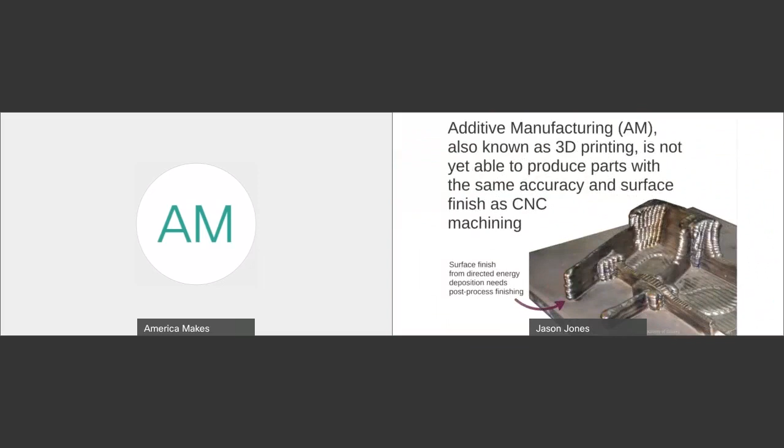Additive manufacturing or 3D printing does not yet produce highly accurate, super smooth surface finishes when you compare it to something like milling or molding or something like that. As a result, many of the parts require some finishing. Obviously, if they're metal or polymer ceramic, they typically follow a different path. Certainly for metal parts, the majority of them do have some machining or polishing or grinding done on them. So in terms of thinking through what's needed for additive, you've got the finishing elements, and also the inspection requirements get changed up when you do additive.

You may have to go for a heat treat, cool down, remove them from the build plate, often a finishing operation, and finally some type of inspection. This post-processing, as we often refer to it, isn't talked about enough, in my opinion, and often it accounts for somewhere between a quarter and maybe up to half of printed part costs.

I've even seen 60% before for safety critical parts that need a lot of attention from inspection. So when we say bring additive together like never before, there are a couple of ways to do that, but it's not just additive that we need. We need all of the complementary technologies around additive to really give it its full breadth and get those parts across the finish line. Once you've printed a part, until it's actually finished, it doesn't actually do anybody any good.

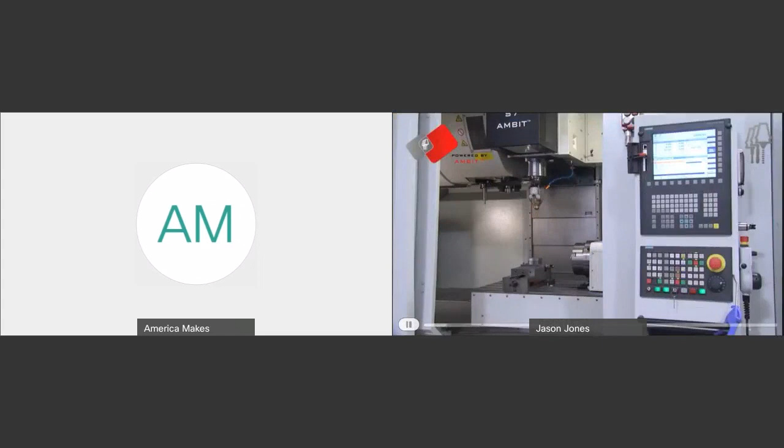What you're watching is a milling machine that actually just loaded a metal deposition head. You can see here deposition of a metal matrix composite. This is a tooling insert, and so the edges typically wear the fastest. We've just reinforced those edges with a different material, a higher performing material. If you look carefully in the video, you can see that multi-material joint.

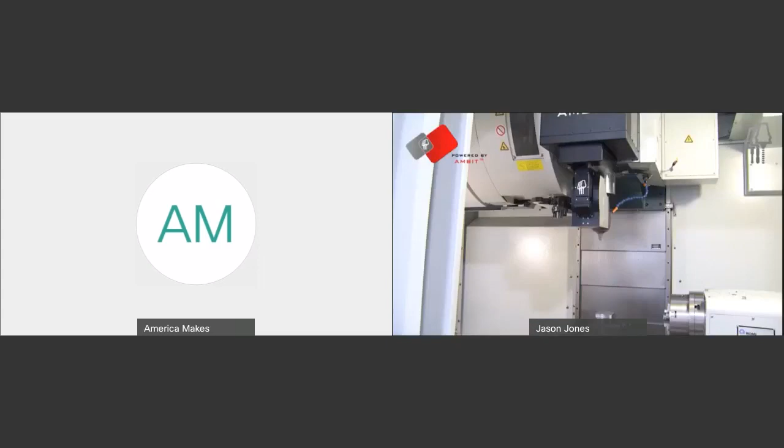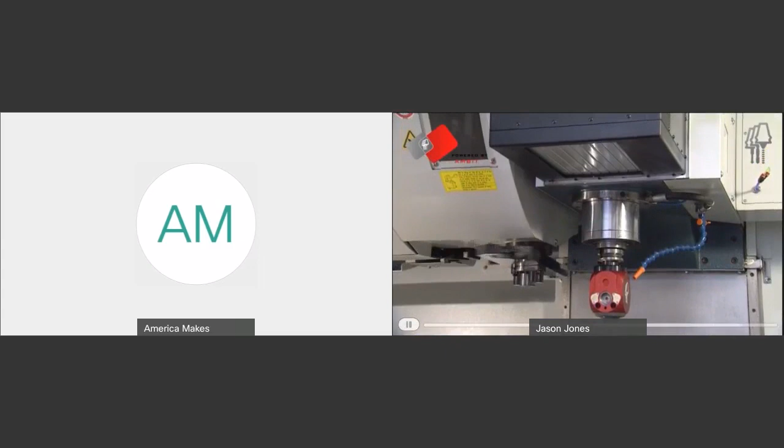After deposition, we want to know that what we've deposited is good. So here we're using an eddy current inspection probe to actually check for surface breaking and shallow subsurface defects in the part, and all of that was done in the same setup. So we migrate from what traditionally might be three different setups and bring them all together so that you can get a fully automated finished product right out of the machine.

So in this particular example, again, it's a tooling insert used in making other things. We're looking for a 2 to 3 times service life improvement. Fully burdened cost to add those edges, if you look behind my hands, was about $13. It adds something like 10 minutes to the cycle time. It's already in a milling machine anyway. We're just using that milling machine in a more flexible approach.

And probably most importantly, it provides a no faults forward way to adopt this technology. So you know your parts are good before they leave the machine. We don't know of a more time or cost-effective way of actually producing this particular part.

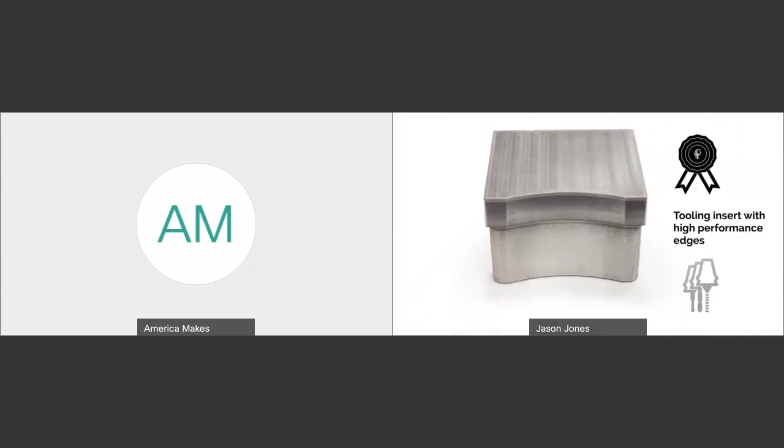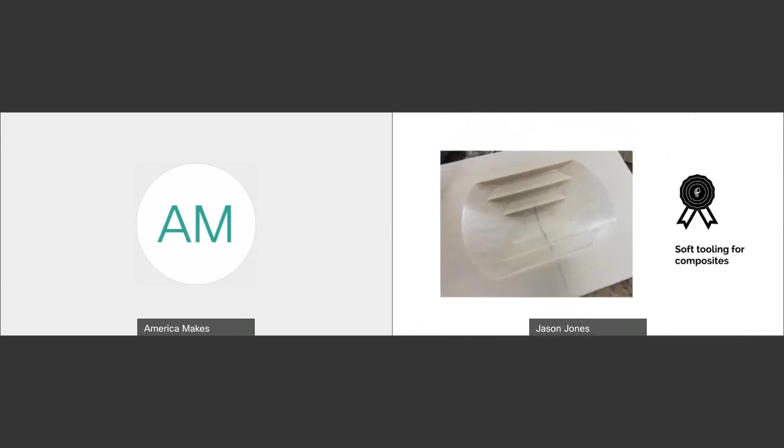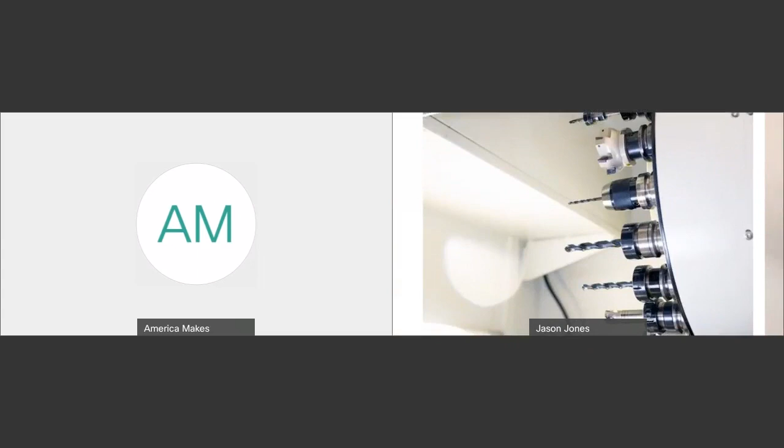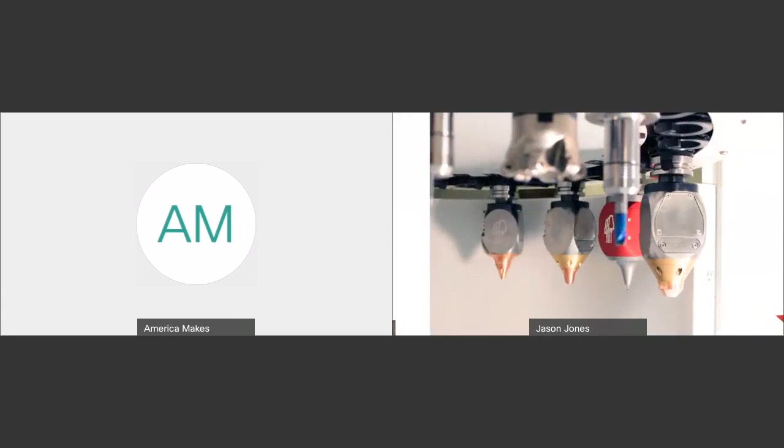So I hope that provides you some background in terms of where we're coming from and why I can describe that additive can be more finished, more polished as it comes out of the machine.

So let's level set with some foundational principles that I hope you'll find useful. First, if we look at AM as unfinished business, did I actually just call additive parts unfinished? And I did. Obviously there are a few exceptions to everything, but the majority of parts made by additive, if they're going to an end user, typically require some kind of finishing afterwards.

We already talked about the fact that the surfaces typically are not as smooth as milling or molding, and the inspection requirements are different, and this part workflow is fairly complicated. In fact, in many cases this actually is a supply chain issue because maybe not all of these steps are done in-house. So we refer to it as a process chain. It may be done all in-house, or it may be farmed out. You may have heat treatment done somewhere else. You may have finishing done somewhere else.

You may have inspection done somewhere else.

One of my early insights into this was when we were looking at a remanufacturing application with directed energy deposition. We were able to do the deposition, but then in order to get it finished, it literally traveled. The parts traveled, not just next door, but in a truck.

It was all land-based, but in a truck to another facility. It then had to go somewhere else to get inspected, and finally it came back around. So it was a very long path to getting to finished parts, which clearly, as more and more people adopt additive, it's desirable to compress and consolidate those, to make it easier.

Most people come into additive thinking, oh, I have to master additive, but once they find they've got all this post-processing, it's a lot more than many of them anticipate.

So I've thought, how can I summarize today's message in a single symbol? And if I was going to think about a symbol for additive or for additive development, clearly the plus sign is one of those symbols that jumps to mind. So for the rest of today's discussion, I'd like to use this plus symbol as an analogy and a map of how additive is developing, both here at Hybrid and within the larger marketplace, so you can see, as new announcements get made, where it's going. As we look at this plus symbol, I'm going to divide it into the vertical stroke.

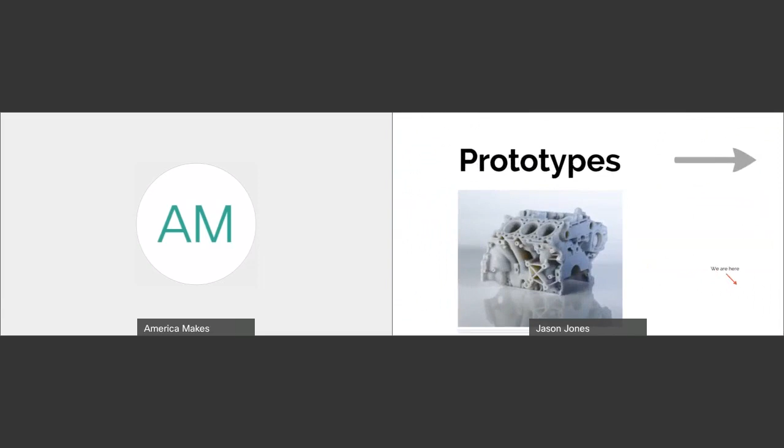So where are we at as an industry? Back in 2009, I was one of the founding members of the ASTM F42 committee, which started writing standards. At that point, we had to decide what to call our industry. Back then, we were not as far along as I point out in that era. We were definitely well entrenched in prototype making. We were looking toward making final parts. And I describe the early majority now as being in between making prototypes and production parts.

Clearly, many people make prototypes, a fantastic application for additive. Now many are also looking toward production parts, and that segment of the market continues to grow in importance and size as a relative proportion of additive parts. If you're not thinking about producing parts in an additive way, we see many people doing low volumes of parts, especially those that can be customized or tailored, that need light weighting or specific types of composition, now looking to production as additive as a production technique.

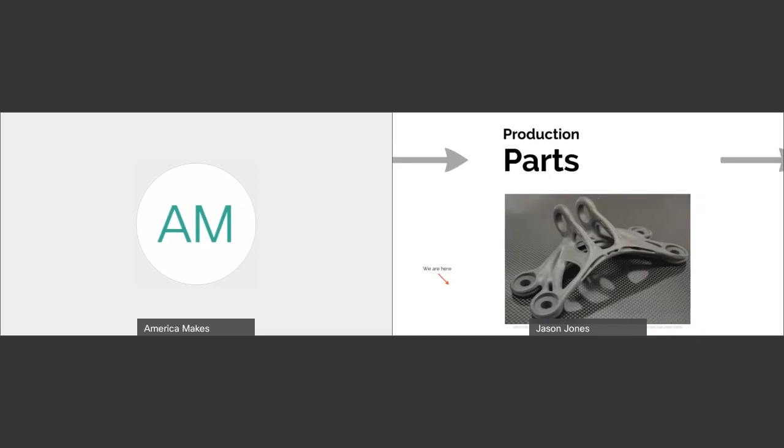As we look a little further into the distance, we see smart products, and now very early adopters are starting to tinker with that. Certainly the research world has been working on that for a decade and a half at least. It's fun to see this progression from prototypes to production parts all the way to smart products.

If we look at the application frequency today in the market, we would put prototypes on the bottom as still the dominant application, with production parts moving up to be close behind it. Smart products are just on the horizon, and we're starting to see some really interesting examples.

If we fast forward a decade, I would argue that this pyramid will actually invert, that prototyping will become so mainstream and routine that it will be commoditized. Producing production parts will provide more value, and the highest value will be smart products that have embedded intelligence and can monitor themselves. So that's where we are from an applications perspective.

Let's look at where we are from a materials perspective. Materials matter an awful lot in additive. You'll recall that on this plus symbol, I'm referring to the horizontal stroke. As additive reaches more broadly to more materials, the applications addressable by it continue to get more interesting. So applications development and adoption is usually paced by materials development in additive.

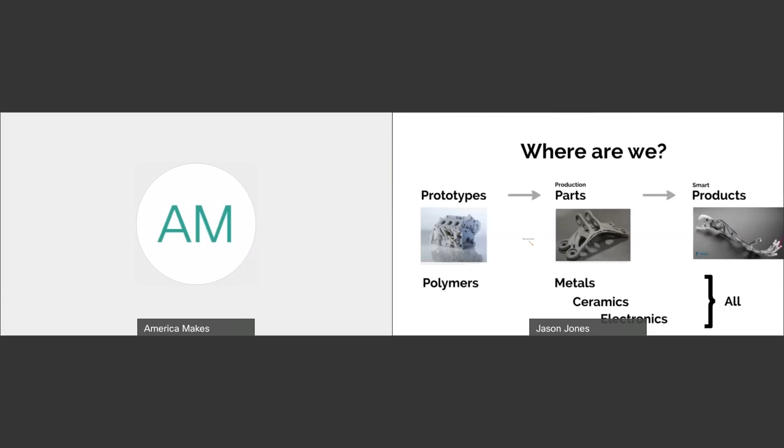But that's the spectrum of where we're at. We're well centered now on production parts, and more people are adopting it. Just over the horizon, in terms of mainstream adoption, is smart products. So there are lots of applications. This is just a map of where a lot of those materials fit and how they enable additive.

So let's look now — we've done applications and materials. Let's look at the processes, the different additive processes. Here on screen is a very colorful graphic that summarizes all 7 of the standardized families. You could refer now to additive as 7+. There are a few newer techniques that aren't super well categorized within these 7, but this represents the majority of additive processes. We created this as a resource for our employees and now have made it available on the website.

Anybody that wants to can go download it. It gives you a little summary of the different categories according to ISO and ASTM and kind of what they're good for. Why are there so many?

At one point I had a very prestigious organization visit. They were getting into additive, and at the time I was a researcher at university, and they said, there are too many types of additive. We're going to come in with our technology, and we're going to really help consolidate — we're going to rationalize away several of the additive techniques. I thought an awful lot about that and watched as they then launched their system, which is a great system.

But from my perspective, it has not rationalized away a bunch of other processes — it just continues to expand. I think that's because of the very diverse set of applications, and also because each of these 7 families, which fundamentally represents a set of physics, or physics and chemistry together, is usually really good at either a type of material — maybe things that cross-link — or one type of feedstock, like powder, pellets, or filament. But not every one of these techniques can accept all the different types of materials that we want, nor can they manage all the different types of feedstock that people would like to use.

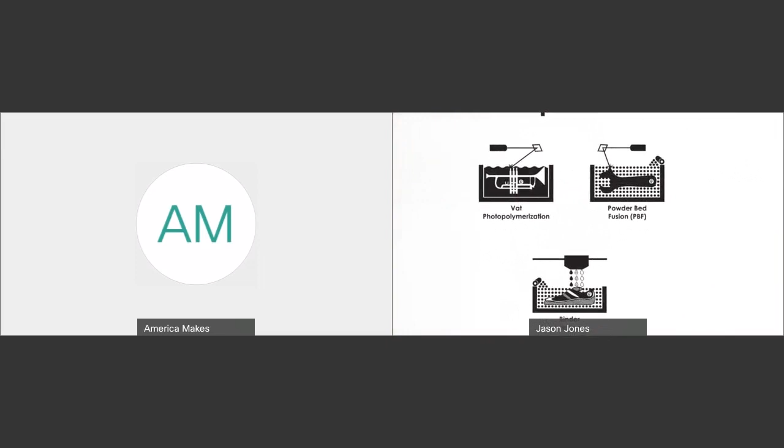I've grouped the 7 families by their digital step. On the left here, I have selective exposure, which is selective exposure to energy. You can see I've listed vat photopolymerization, powder bed fusion, and binder jetting—selective exposure of a binding agent, energy, something like that, even chemistry sometimes, to be able to make it work. Here's an example.

Here you'll see this is a powder bed fusion machine. It's using an electron beam, but that powder has been globally pre-placed everywhere, and then only the energy is selecting what part of that powder gets consolidated into the part and what doesn't. At the end of this, you'll watch that powder gets spread across into a new layer. Again, it's a global application of material, and then the selection step is exposure of energy. Hopefully you saw that spreading going across.

So in contrast to that—selective exposure—these processes tend to shine where you look for geometric freedom. They're really, really good at creating complex internal geometry.

In contrast to that is selective deposition. I'll give you an example here. In this case, rather than having material pre-placed, this material is being placed at the same time it's being consolidated. So this is a laser-based directed energy deposition technique, and it is an example of selective deposition.

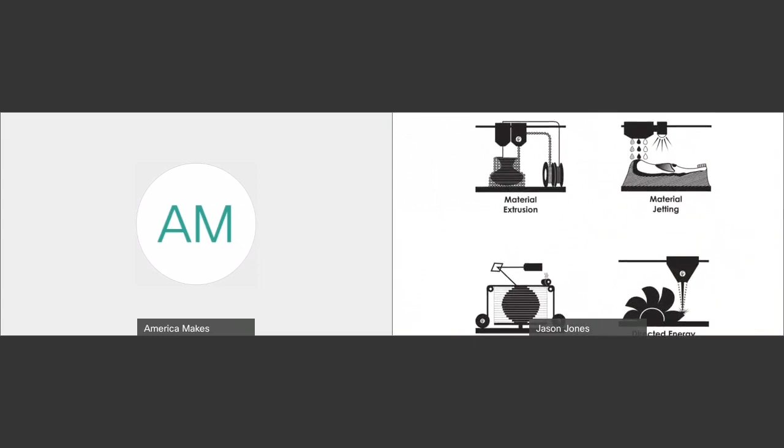Included with these, I've listed here 4 of the 7 families, and I include material extrusion, like desktop printers, material jetting, sheet lamination, and directed energy deposition. So roughly the additive families divide half and half between these different types of digital steps. I'll just add that selective deposition really shines often where you're looking at compositional freedom and the ability to vary what a part is made from, either holistically or even different features, elements, or graded compositions are possible with many of those. So this digital step framework, I hope, gives you context.

What you'll find often is, especially larger scale additive companies, they will typically cluster around one or the other of these. If you're really interested in this idea of selective exposure versus selective deposition, I wrote a paper a long time ago—about a decade ago, actually—and explored that in more depth. So if you're that interested, you can go off and look at it.

But I hope as a visualization, this helps you keep separated what's what and what is easier to combine with others. Clearly, as we look at trying to reach across different types of additive, selective deposition is easier—it's more compatible in nature in terms of creating multiple types of additive together, although powder bed isn't to be excluded. Selective exposure, vats and powder, is really how those two break down.

Certainly, as you look at critical technology elements, either in your company or within your organizations, I highly advocate that you could actually identify: these are needs that apply to all 7 families, these are needs that apply to each individual one of the 7 families, but you could also then do it by the digital step.

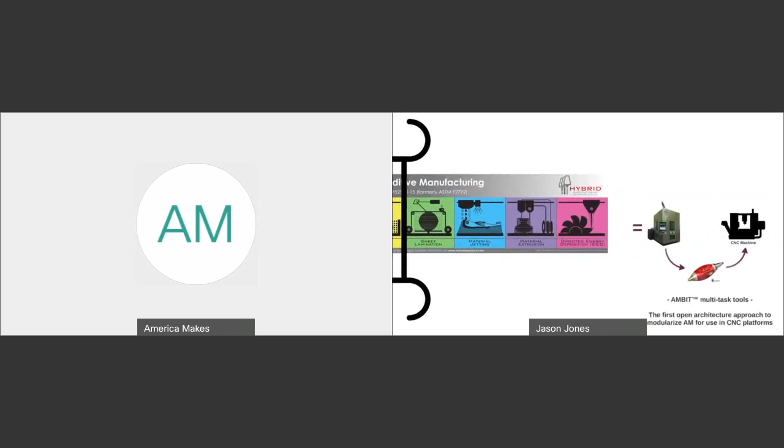So what does that look like? Well, this is a polymer composites head now being swapped for a metal deposition head. To our knowledge, this is one of the first setups that allows deposition of metal and polymer in the same machine. It doesn't use the same head, but it's the same machine, so you can swap back and forth on the fly and use metal or polymer together.

I'm pleased to share a part from one of our customers—this is from Iowa State University, who are using this approach to join metal and composites. So now you have the capability for multiple materials, not just within a narrow family. We've had multi-material where you do different types of acrylics or different fills, but this is fundamentally very disparate in nature, combining these different materials.

We know that various industries, from aerospace to automotive, as people look to lightweight, are struggling with this—how do you join metal, composites, and polymers all together? Doing it in a single additive setup really pushes things forward and brings additive together in a way nobody's probably ever seen, at least not to my knowledge. It's an exciting space, keep watching it—you'll see more.

Also, as we look at additive, we think: how can we expand that horizontal stroke even further to embrace more in an automated mode rather than having to manually move it along?

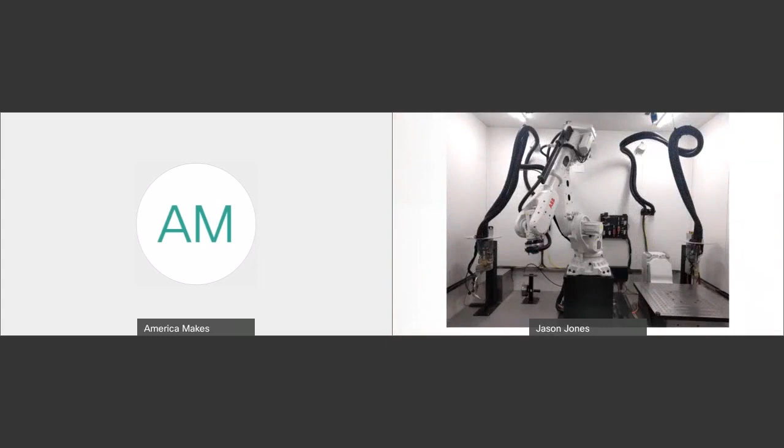We look at multiple scales of deposition. Here I've got several examples. This first example is a fantastic cell using multiple types of feedstock, both with a directed energy deposition approach—wire and powder feedstock, which come in different scales but also get deposited usually at a different scale. Wire tends to be geared toward larger parts, and powder is often used for smaller parts, particularly where harder materials may be desired that don't draw into wire very easily.

Here's another variation—these are deposition heads that we make, and you can see different types of nozzles. They correspond to different scales and different interactions with the material so that you can optimize what feature you make with each one.

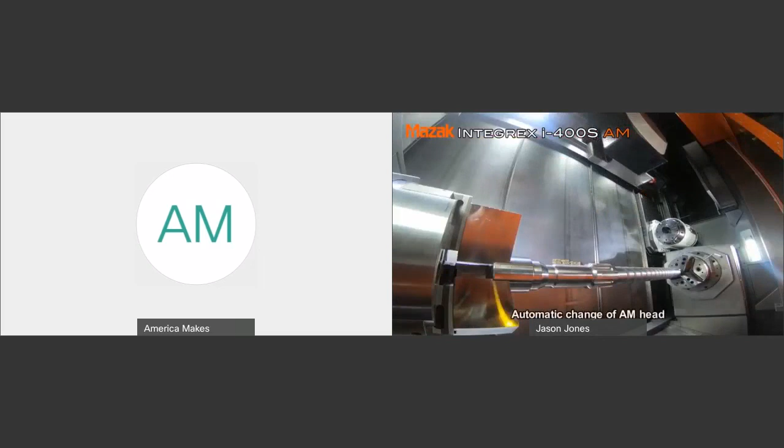Here on screen is a video—this is a Mazak hybrid machine that integrates those three heads. You saw each of those heads doing what they're best at. So you no longer have to have a single head that does everything or is compromised in some areas. You can optimize on a feature-by-feature basis what you need.

Now I'm going to use this idea of how do you branch out with additive and make it more accessible. One of the challenges with additive—one of the blessings and challenges—is that it typically starts with flat layers on a flat build plate. That's natural when you build parts from scratch.

Some types of additive are amenable to adding onto existing parts, and when you do that, frequently you're getting things that are not planar, not flat, and you have to decide what to do about them. In this case, this is a directed energy deposition head onto a flat substrate—no problem, very easily done. There's an example of it in real time.

Then you're like, okay, actually I have a tube now and I want to add to the outside surface. You can rotate that tube and address what you need from the outside—good, job done. Then you get to slightly more difficult scenarios where you want to add to the inside of this part. Bear in mind, this tube is already made—you're not building it layer by layer. Often having a pre-existing tube and adding only high-performance material gives you a very different business case. It enables you to do things at larger scales and in other areas that are not feasible from an economics perspective for many parts.

So you think, okay, I could tilt that part 45 degrees and access that with a single nozzle somewhat. And you can, and it is done. But once you're in this place, this is actually a compromise. Normally, in directed energy deposition, being normal to the surface is ideal, right? You get to absorb most of the energy, it's the most efficient. Here, you're in a suboptimal condition simply because of the form and the access that you want.

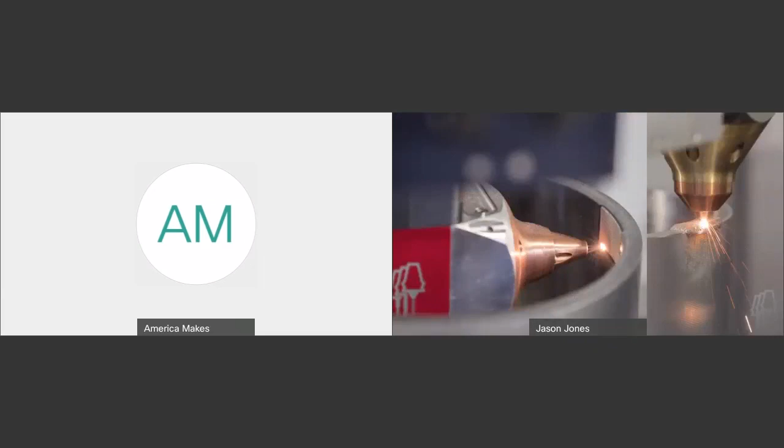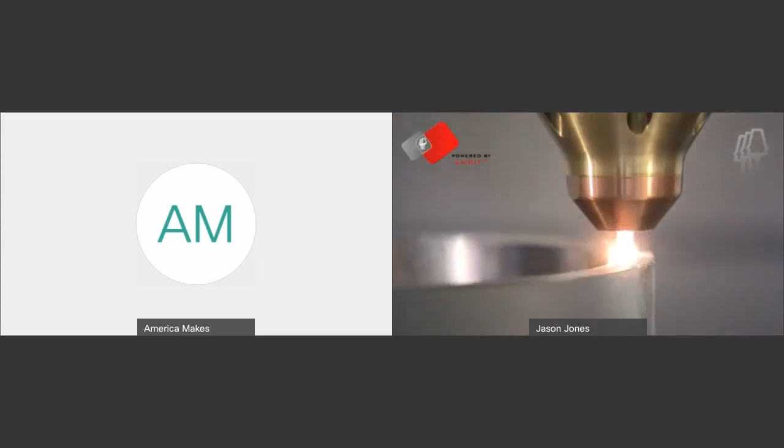I'll show you a quick video so you can see it in context. Most people do quite an elaborate changeover process when they switch from an internal cladding head to an external cladding head, so the easier we can make this, the easier it is to adopt. This is not just internal cladding on a diameter, but with a spiral path, you can actually create features and patches and do whatever you want. You can also switch to a different type of head, as we just showed, and deposit up on that upper edge. Now you've got continuous clad on the upper edge and on the inside, and you haven't had to make the whole thing from scratch.

As we look at additive and how we reach out more and more horizontally, we think, okay, multiple types of physics and also multiple implementations to enable scale, right? One of the beauties of additive is that mixture of scale where you've got macro scale and finer microstructure, microscale as well.

Now, as we head into almost our last little bit, I want to talk about post-processing. That word post-processing represents the vertical stroke on the plus, right? This is process chain, and it may also extend to supply chain consolidation. I hear a lot in the press about full stack. We are a full stack 3D printing provider.

This term has been borrowed from the software world, and I accept that, when you do the software for slicing and you engineer some of the material and you do the actual printer, you certainly are embracing larger scope and therefore should have better quality control, et cetera. So I'm happy with that at that scale. But as we look more broadly with post-processing, very few, if any, 3D printing techniques actually are a full stack process.

So in that sense, if we look at post-processing, in this case, I've taken each of those 7 families and said, what if we were going to do parts that needed additional steps? I realize some of these can be used without all of the steps, but certainly as you look across, a post cure in an oven, a stress and heat relief, a heat treat to stress relieve things, additional types of curing and finishing and all of those types of steps. Certainly removing support material is a huge one, and removing from a build plate is almost universal.

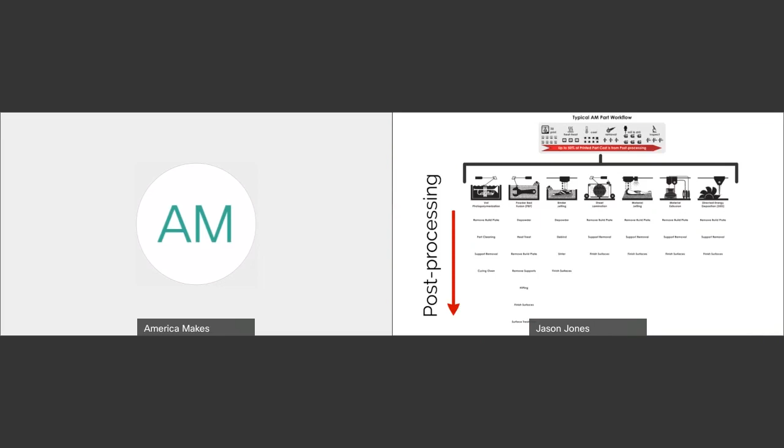So as we look at all those steps and think of that vertical stroke in the plus sign, how can we consolidate these and make them simpler? Here's a couple of words to think through. They all start with an F, so there are 4 words. Forming is the first, and then fusing.

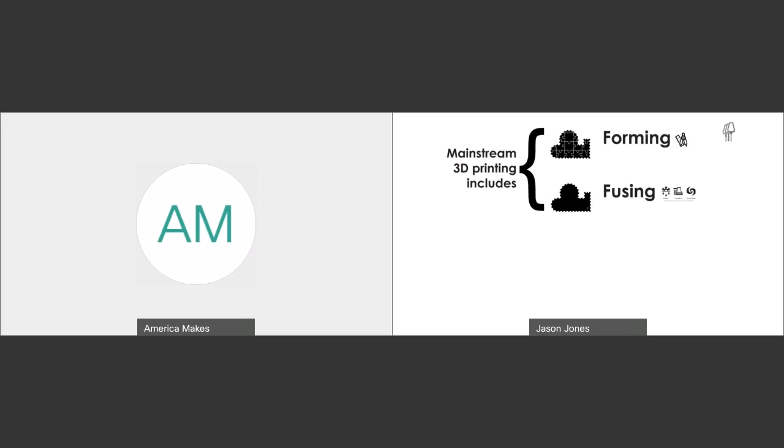Mainstream 3D printing includes forming and fusing, almost always. Now, they may not be done in the same setup, but if we think about forming, it's shown here with puzzle pieces. We're fundamentally creating a geometry, normally in layers, and getting that geometry to as good a tolerance as the physics will allow.

Next, there's a consolidation step. I use fusing here in a very broad sense, very aware that it may be done with thermal fusion and resolidification, or chemical or solid state means—this is a consolidation step generally.

3D printing almost always addresses both of these, not always in the same step. We see a growing number of cases where you form the part into a green part, and then it gets sintered downstream, whether it's ceramic or metal or other things. That's an exciting development in our industry, and certainly helps improve access to those types of materials, but it also creates additional steps.

Once these parts are made, whether in a single setup or more than one, often they need finishing. Certainly, the more dense your material and the more precision you need in those surfaces, the more energy and effort you need in the finishing domain.

Often this happens with a CNC machine. And then if you look one step beyond that, you need quality assurance, so you need some type of inspection or other means to know this is a good part.

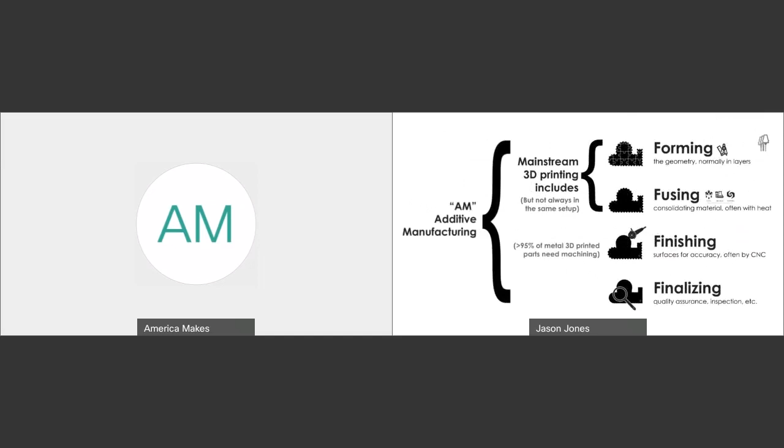So as we look at forming, fusing, finishing, and finalizing, manufacturing embraces all of those steps, not just the forming and the fusing. To get to true additive manufacturing, our view at Hybrid is you need to embrace all four of those. And to the degree we can automate and simplify the production process, it becomes easier to adopt and more cost effective.

Now, conventional thinking is to take all of the words that begin with F - forming, fusing, finishing, and finalizing - and say, well, let's just put a robot between each of them, right? And then we'll eliminate the need for manual handling between each step. And there are times where that makes sense, absolutely.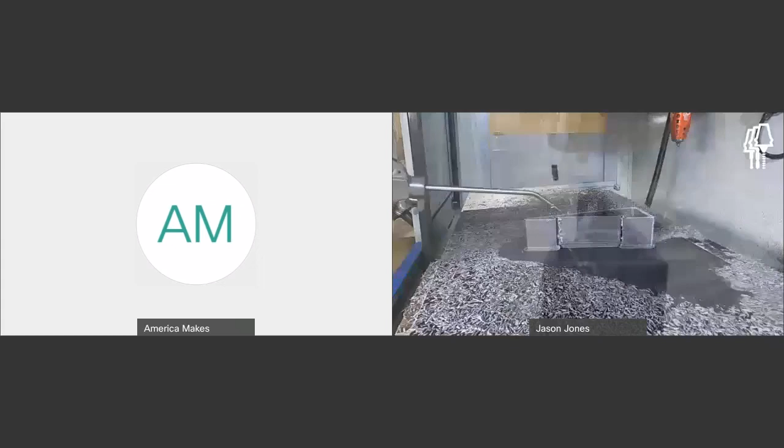Now, once that's been deposited, clearly the surfaces are not precision. But in this case, in the same setup, you're able to finish to a very nice surface finish and high tolerance in terms of part precision, which can then be used as a fixture for either setup or CMM or other types of activities.

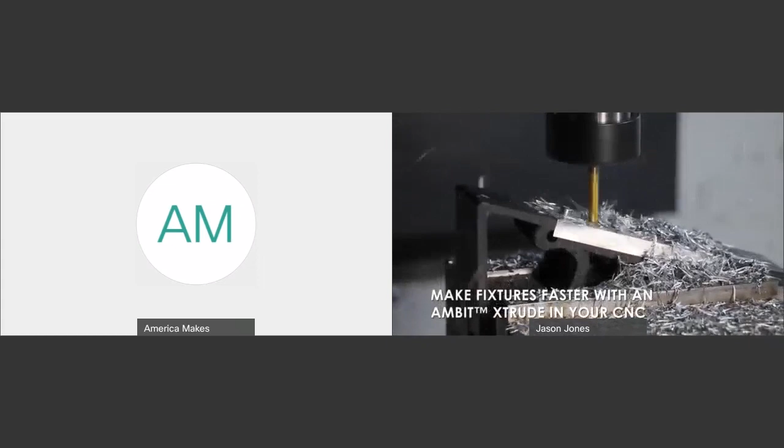So this hybrid approach has been seen early on in metals. It's been gaining momentum the last several years. We actually hosted the first event dedicated to polymer hybrid manufacturing back in February and had a phenomenal turnout from 3 continents. It's really fun to see this philosophy of trying to bring additive together with its complementary technologies all into a single setup.

Now, there's a discussion that goes on after additive, and it goes something like this: How do you know your part is good inside and out? Often the answer I get when I walk up is, 'it worked last time.' And then the question is, is everything the same? If it is, well, great. And if it's not, what if this is the first time you've ever made it? There are so many times we use additive for one-offs or two-offs or a very small number of parts. How do you know it's good?

So if we review again this post-processing chain, you can see that inspection - how can we get inspection closer to 3D printing so that you don't have sunk costs in heat treat, and so on. Let's suppose there was an error during printing - all of this work leading up to that final inspection step would then be wasted effort, which again is significant, often 25 to 50% of the cost, certainly on metal parts.

Can we get something that's rapid and in situ to tell us the part is good? There's lots of work on monitoring and instrumenting 3D printing and additive manufacturing machines, and that is boding very well. Clearly, the customer has to accept these methods. So even as each manufacturer works on in-process monitoring, the jury is still out in many cases on how effective it really is. So if we look at what the customer already knows and can accept, we recently had an opportunity to look at something that was really more of a surface coating type technique.

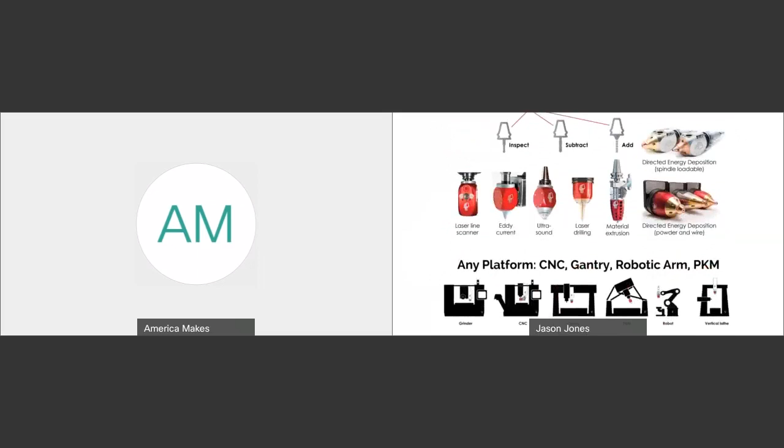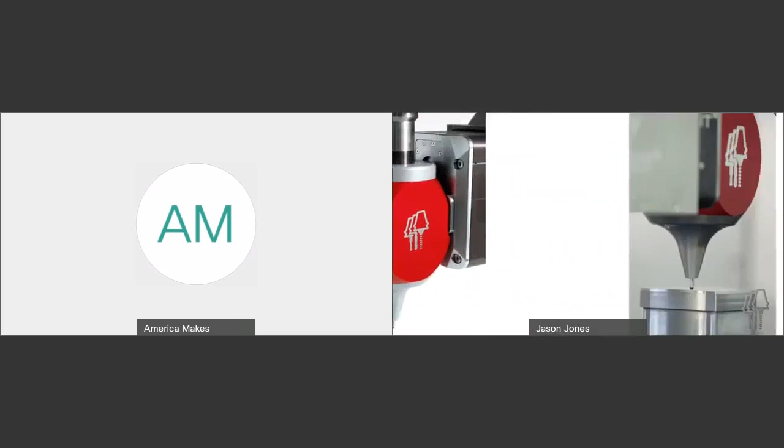If you've got a surface coating, you've got dye penetrant, eddy current, and microscopy. Only eddy current is really fast and easily viable in situ. So drawing on our experience producing heads, we said let's use the AMBIT eddy current probe and demonstrate what value could be there. So there's the probe right there, and here it is actually being used with a part.

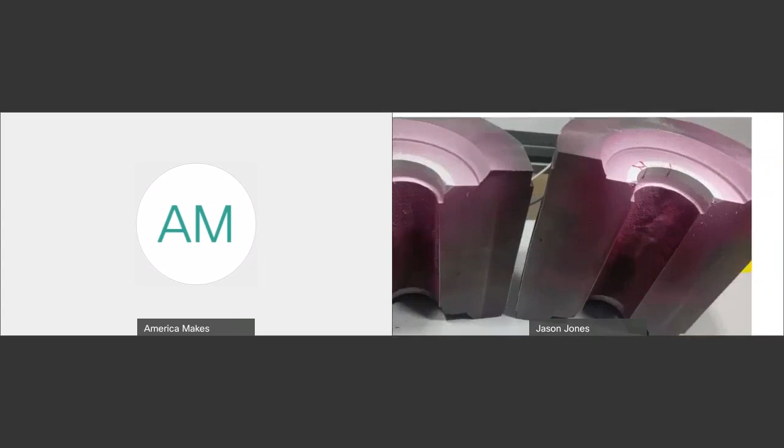Here is a different set of parts. You can see dye penetrant, which is the competing technique, that pink hue on each part. On this right-hand part you can see some very stark lines - those are cracks. With dye penetrant you spray it on, then spray a developer on, and when it develops it shows up very well. It's a very easy way to spot cracks, and it's fairly convenient, doesn't require a ton of resource. The problem is it takes 15 or 20 minutes for these to become really clear and well developed.

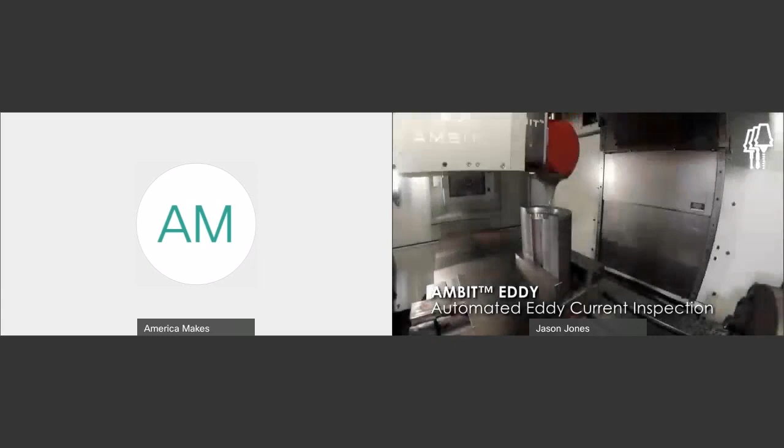So my team often has to unload those parts. We said, how can we do it fast enough that we can do it in the machine? That's what this video shows. This is real time, this is the eddy current, and here it is inspecting along the inside of a mold.

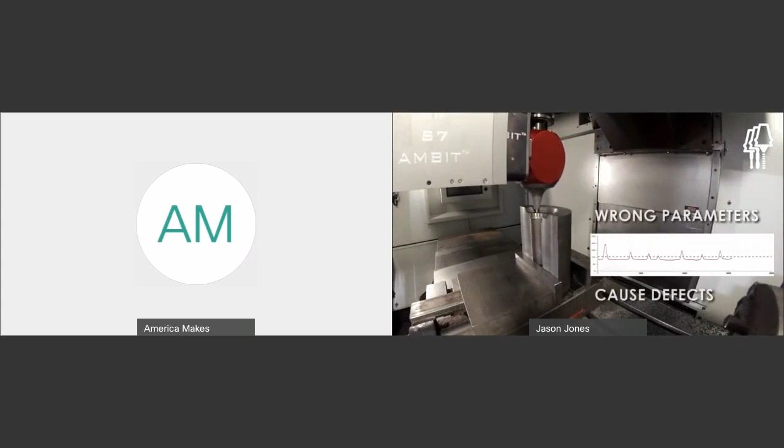On these parts you can see this red trace going up and down - these were wrong parameters which caused defects. Then this was the same geometry, and this example shows the correct parameters being used. You can see that trace now, which is green. So here we have a comparison: wrong parameters, defect count 8, and then right parameters without defects.

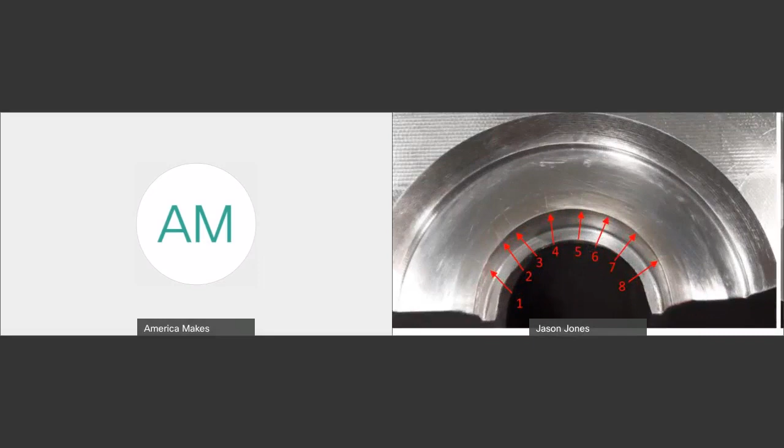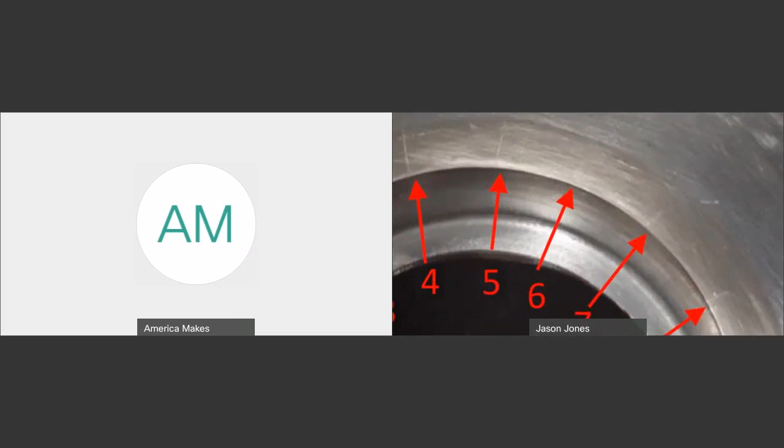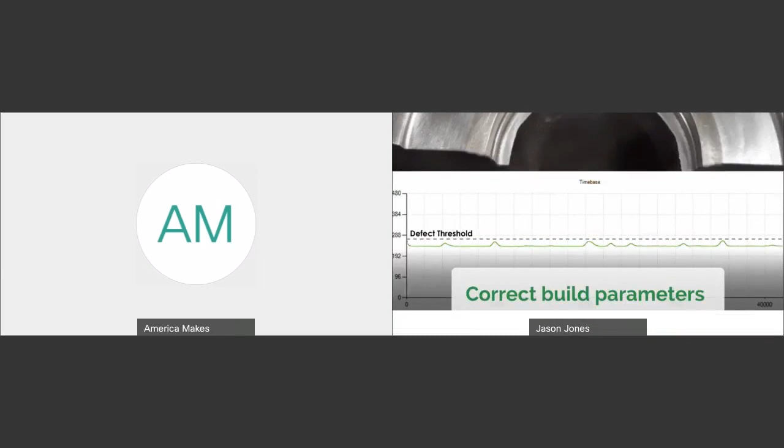This represents a level of automation to in-situ inspection that's hard to come by. Here you can see the actual cracks on that part that were detected by the eddy current probe, and there you can see all 8 of those - 100% success rate on that inspection. Even number 6, that crack is difficult to see without magnification, and yet eddy current is able to easily identify it. Likewise over here, this is a good part with correct parameters, and you can see this green trace - nothing exceeds that defect threshold, which is excellent.

That enables you to go forward with production of defect-free parts, and that is another example that helps us bring together additive in this framework.

As additive gets better and better, we are going to see more and more of this shift from centralized manufacturing to distributed manufacturing, which is clearly a benefit in terms of being close to the user, higher availability, less transport required. It's an exciting era.

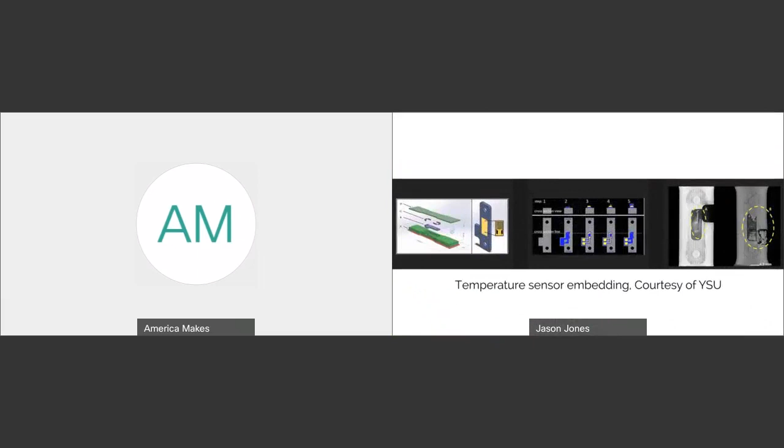So again, rounding out for today, I hope this plus symbol provides you with an imagery and a little mental hook to be able to visualize better and better the different types of additive, the different directions that they are developing. I'd like to thank you very, very much for joining me today, and I'm happy to take any questions.